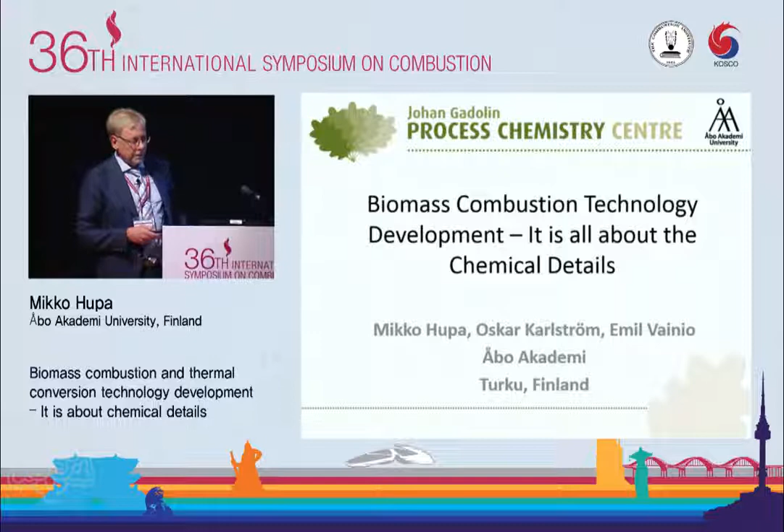I will speak about biomass combustion, and my main focus will be biomass combustion in larger units. It is heavily increasing in Europe and in Northern Europe, and there is a lot of interesting technology around it. The large-scale combustion of biomass can take place as co-firing together with other fuels, including coal, or it can be done in separate large-scale biomass units. Here are two examples of such units.

Fluidized beds. The upper one is a circulating fluidized bed by Foster Wheeler, and the lower one is a bubbling fluidized bed, another type of technology. Both of these are quite interesting when using biomass in large scale. For those of you not familiar with this kind of technology, here is an idea of the size - this is the guy you may be seeing here. They are very big units.

One important trend at the moment is the increased interest into lower grade biomasses. Wood as such, which was the starting point for all this technology, is in fact a relatively easy fuel in many ways. But when the interest goes to lower grade biomasses, many interesting things start happening on one hand. On the other hand, they are quite interesting fuels because they are cheap in price and easily available. So people have now started more and more talking about opportunity fuels rather than harmful wastes.

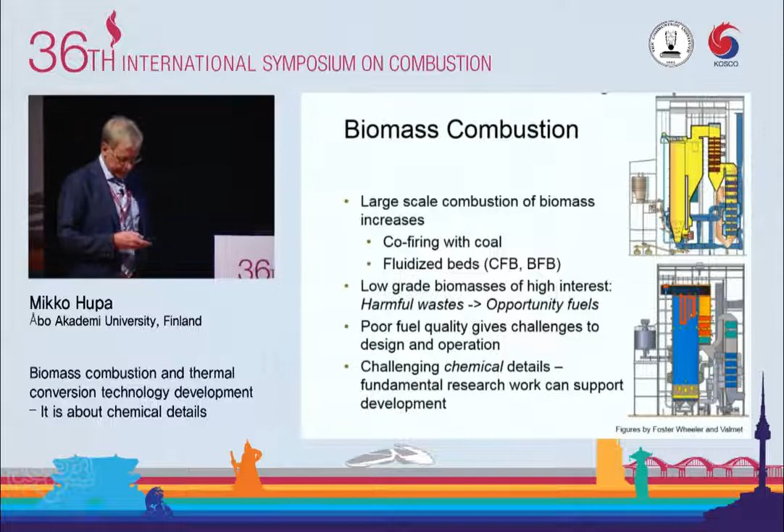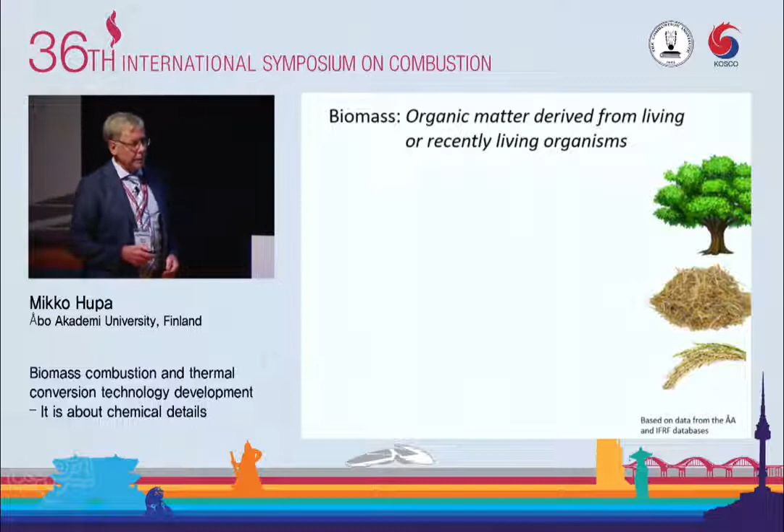Biomass is defined in different ways. This is a good one: organic matter derived from living or recently living organisms.

The graph which is used for coal, where we have a hydrogen-oxygen plot, hydrogen to carbon ratio, oxygen to carbon ratio, shows quite nicely how biomasses relate to coals. In this kind of graph, anthracite coals are down here, with very low hydrogen and very low oxygen. The younger coals place themselves here, with brown coals and lignites further ahead.

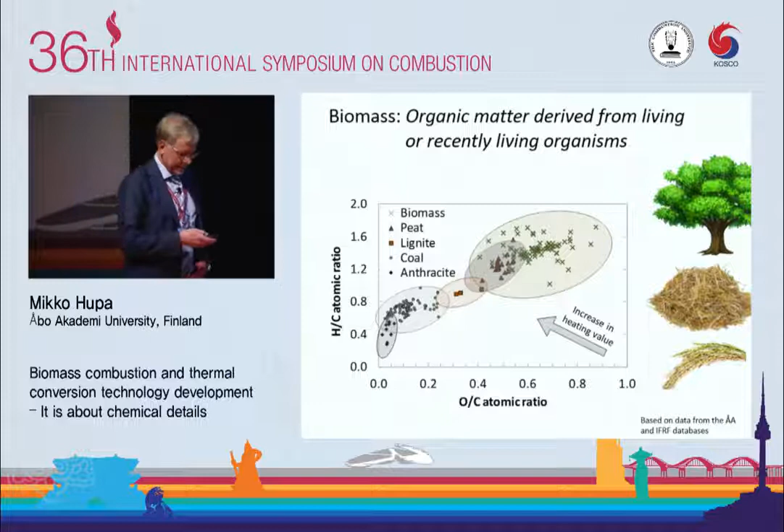Then comes an interesting group of fuels called peat. They are just in between before coming to the biomasses. So in a way, biomasses are very, very young coals, but from a combustion point of view, they are much more than that, and there are many other aspects. In this kind of graph, the heating value goes in this direction.

I have another picture showing the same relationship. Starting from anthracite, the volatiles content goes steeply up, and for most wood qualities or biomass qualities we speak about 80+% volatiles and 20% fixed carbon. The lower heating value in the same way goes down, so they have a low heating value, but on the other hand, as I mentioned, some of them are quite available and inexpensive.

Very importantly, they have very different ashes as compared to coal. The whole ash chemistry is different. For instance, the ash indexes being used in coal have absolutely no relevance when it's about biomasses.

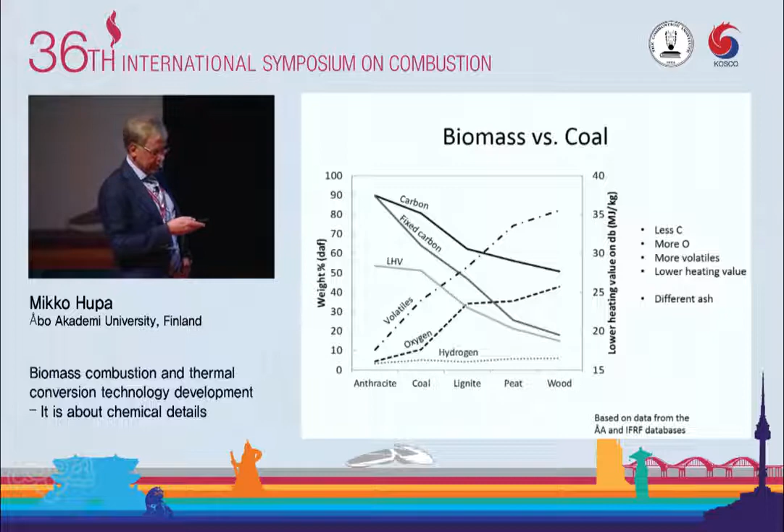Here is an example of one modern large-scale unit using biomass. It's a circulating fluidized bed in Jakobstad, Finland. Here is also the guy, so it's a huge unit, 550 megawatts, and it has the possibility to burn very different fuels.

Extremely interesting concept, but very demanding. You cannot burn all of these fuels from 0 to 100%. You have to know very well which combinations are possible.

One additional point here is to show that also here where the main fuel used to be bark or still is bark or wood, there is an increasing interest to start using also something we call forest residue. Forest residue is the material that stays in the forest after the paper guys have taken the logs. This green material consists of branches and needles and so on.

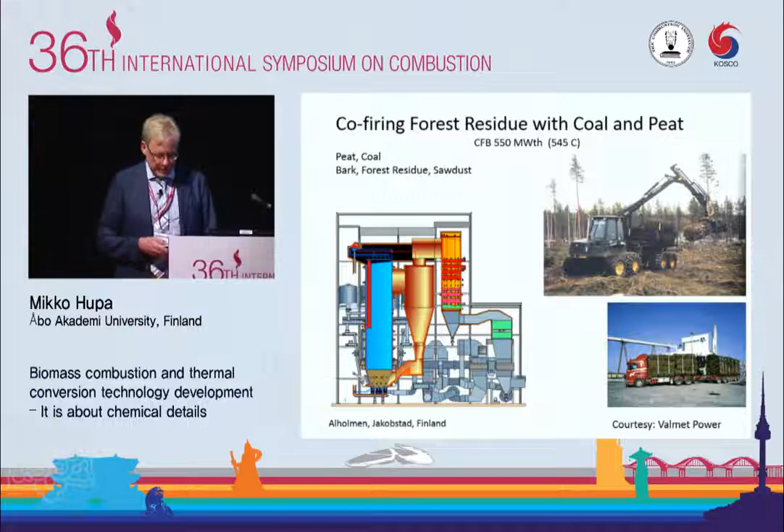There is a big interest, and also new technology to more efficiently collect that material and bring it in the same trucks that are used for logs, for this fuel. And then it can be burnt.

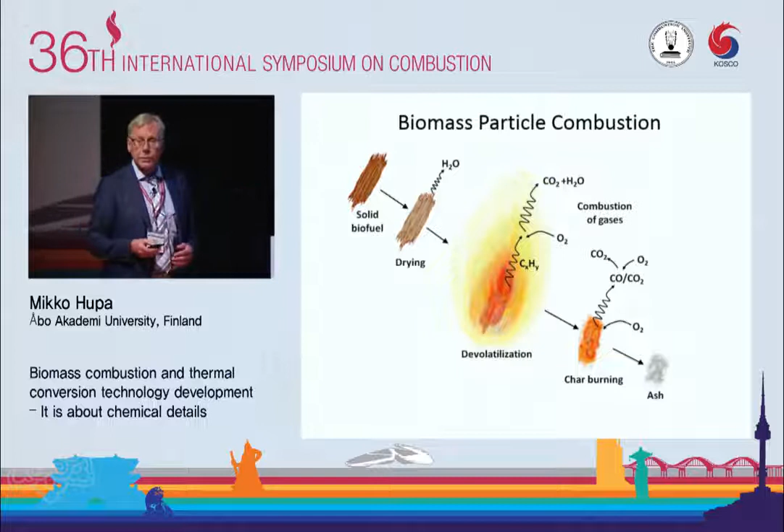Biomass particles have the same stages of combustion as coal: a drying stage, where normally there is more water in biomass than in coal, then the devolatilization stage, the char, and the ash. Devolatilization is more important since 80% of the mass disappears there. The char properties are also different, not only is the char smaller.

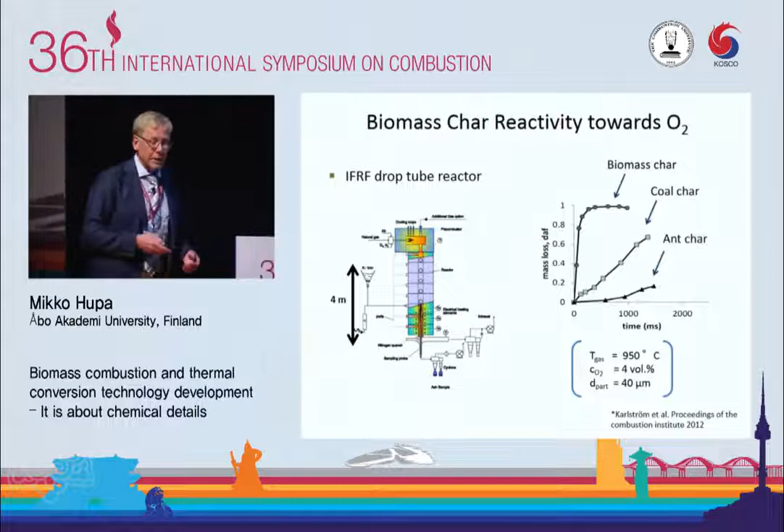I have a few examples here of char. These are test results using data from the International Flame Research Foundation database, produced in a drop tube furnace. Here are mass loss, or char carbon conversion, for anthracite, bituminous coal, and biomass, at a residence time of 1.5 seconds. This is just the char, not the complete fuel. You see the anthracite char reacts very little, while biomass can burn the whole char in this very short time. This is the same size, same mass of char, but the reactivity is much higher for biomass.

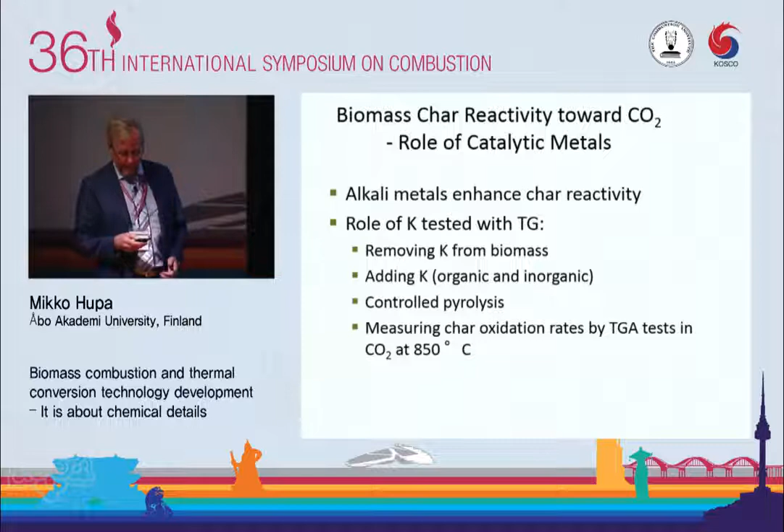That higher reactivity has to do with the ash ingredients in biomass, particularly the alkali metals like potassium. Recently we wanted to learn more about which factors affect char reactivity, so we took biomass and produced chars with different contents of potassium to see its influence. Here we have a biomass that we completely washed before producing the char, so the potassium content was zero. Then we added potassium, even in different forms, to the fuel, produced the char, and measured the char reactivity by TGA.

Here you see the char oxidation rate in percent per minute. This is not in air, this is in carbon dioxide, where the same reactivity is easy to detect, and you see, in a funny way, an almost linear correlation. We didn't add enough potassium to see it level out later, but definitely it will do that. This is just an interesting thing to learn, how sensitive it is to the potassium content.

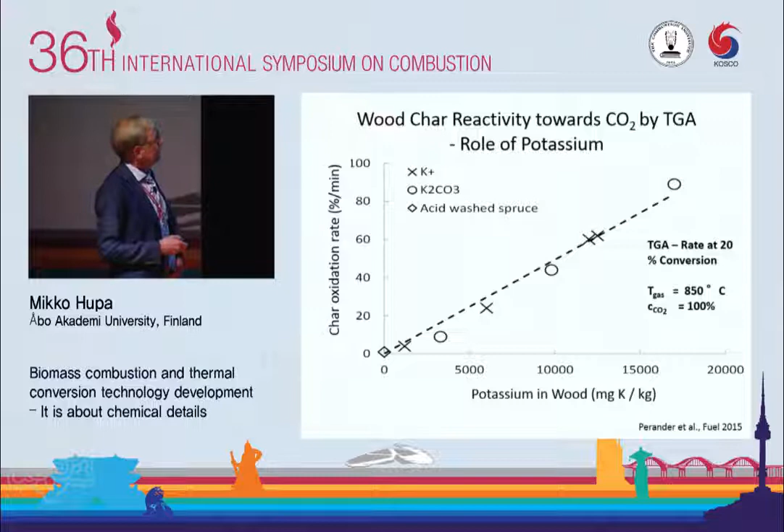Reactivity summary: very high volatile content, extremely reactive char due to catalytic metals. Char oxidation by CO2 and H2O is also so fast that even in ordinary combustion, those reactions need to be taken into account besides the direct reaction with oxygen. We've seen this when modeling particle burning, the gasification reactions need to be taken into account, otherwise we don't get it correct.

This has a very important technical consequence. Since the char is so reactive, that explains why we can burn biomass using bubbling fluidized bed technology, where all the char combustion takes place in the bottom of the boiler, instead of going to a circulating bed where char particles have a long residence time in circulation. This is needed for coal because of char unreactivity, but here we can burn it this way. This is much simpler and a less expensive solution.

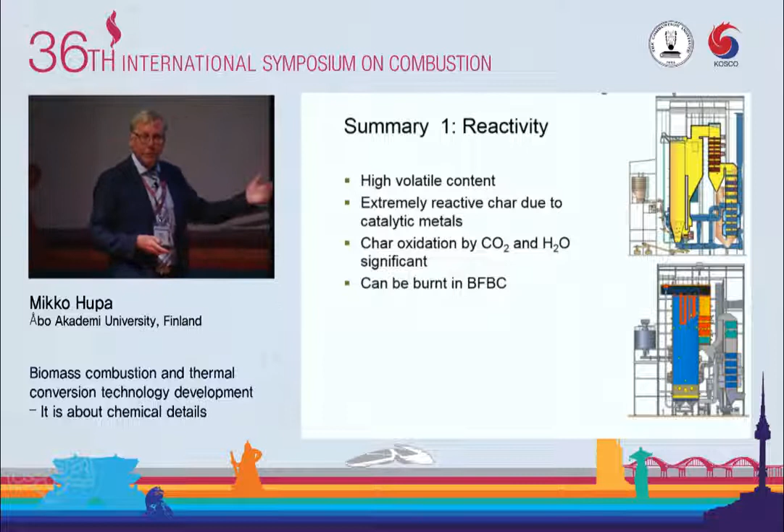In fact, the bed itself here in the bubbling bed is slightly reducing, so there is not very much oxygen there. So the char conversion mostly takes place by CO2 and water vapor gasification.

Some words about nitrogen chemistry. It's not very well studied before. You would expect it to be similar to coal, and partly it is, but partly there are nice surprises. The nitrogen content in different wood qualities is in the range of 0.1 to 1%, slightly lower than for coals, but it's still there.

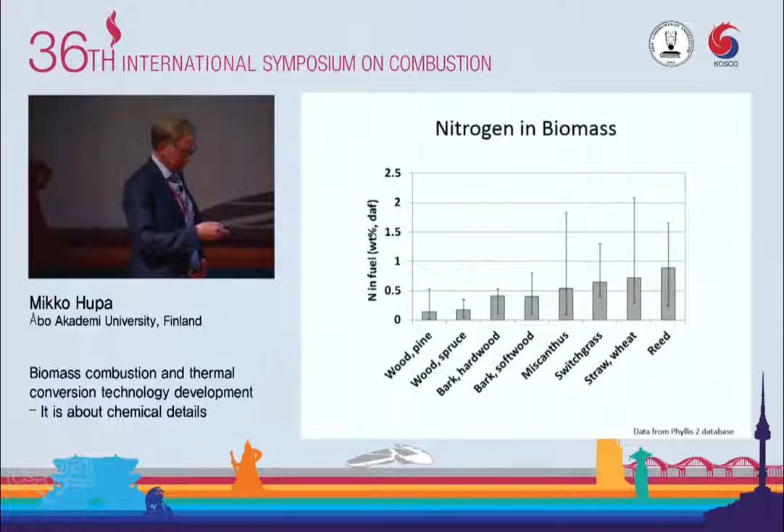If we burn individual particles, like here, in a laboratory, we can see nitrogen oxide formed. First the volatile nitrogen oxide, and then later the char nitrogen. Even if the char amount is small, it still also produces nitrogen oxides.

This is similar to coals, but of course the ratio between these two is very dependent on fuel quality. We were curious about this shape of the char.

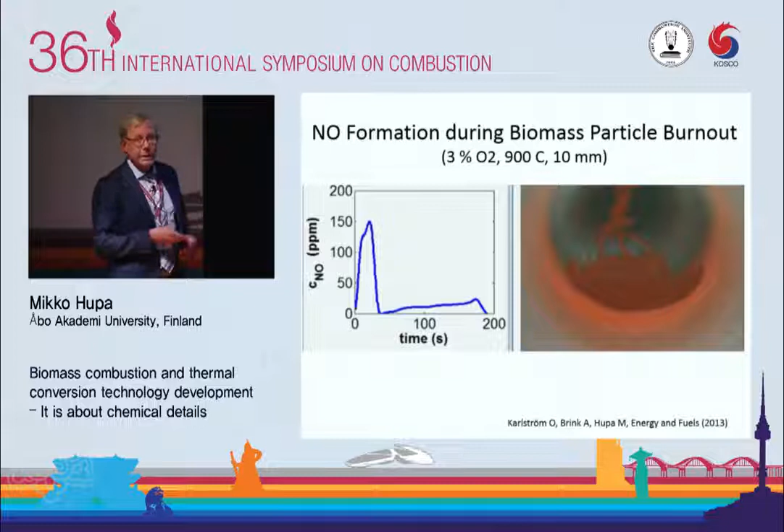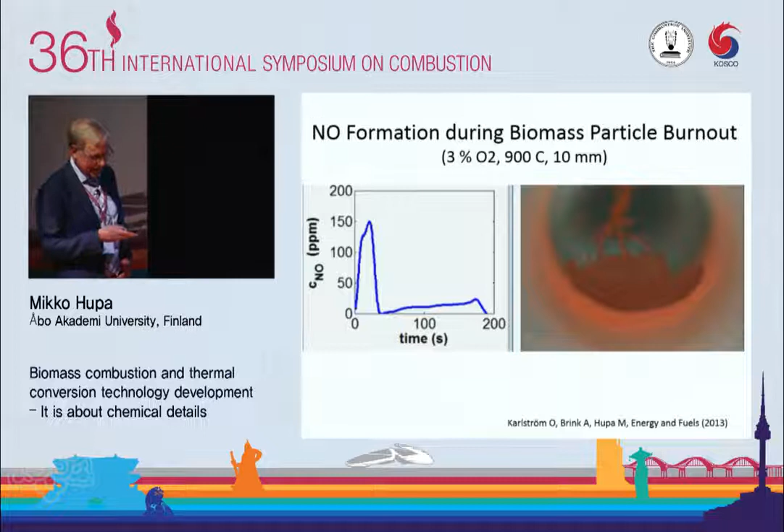Nitrogen oxide production: why is there hardly any at the beginning of char oxidation, and then the maximum production is just before the char is burnt out? It was maybe not so practically important, but it was a fascinating question to ask, so we studied it a little more.

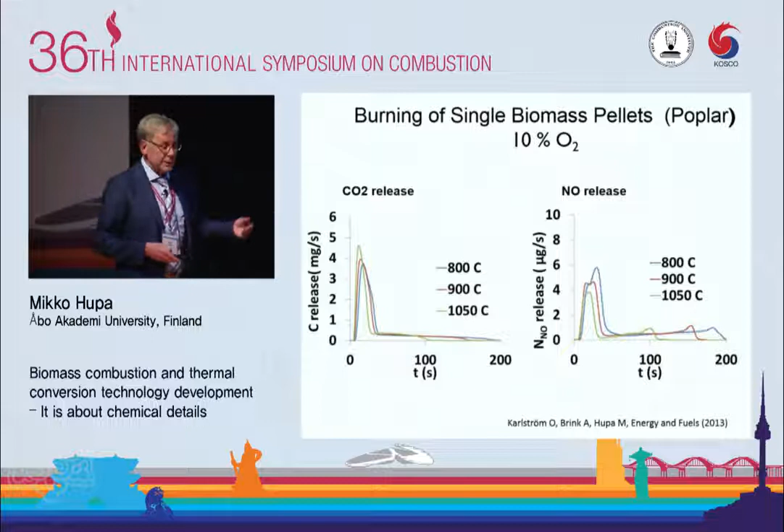The explanation here is that during char burning we produce NO, which is a heterogeneous process. Part of the produced NO diffuses away from the particle, but part of it can diffuse into the particle, and that is the key to this phenomenon. This ingoing NO will be reduced to N2 because of the active char.

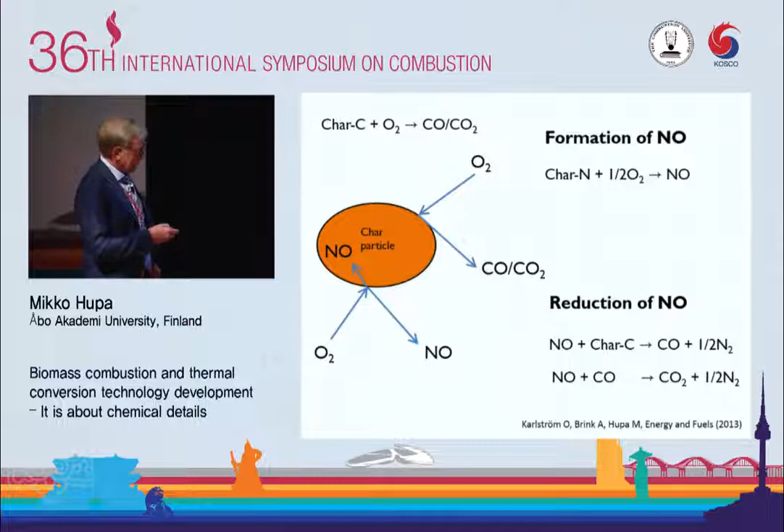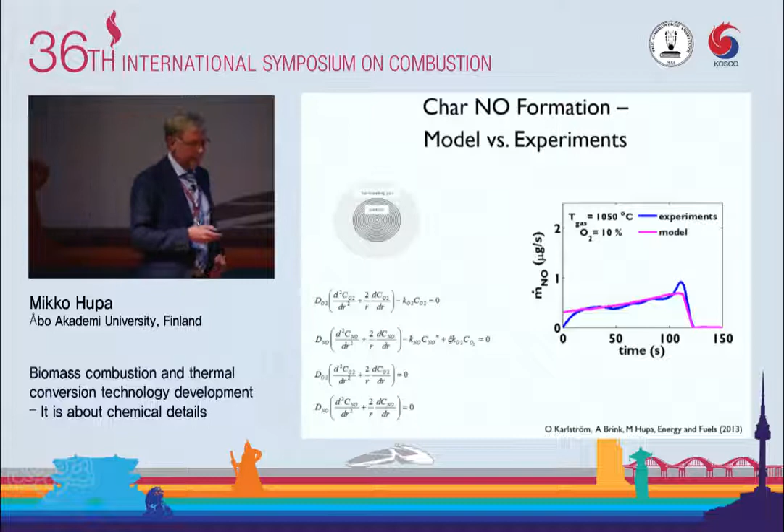Again, the specific reactivity of the biomass chars gives the explanation. This you don't see with ordinary coals, but here the reaction goes this way. We can model it, we can produce a standard model, and if we take into account the diffusion of NO and oxygen into the particle, we can create a model which reproduces this phenomenon nicely.

But what was more interesting, we did tests in a large-scale unit. This is the unit, a fluidized bed with a big freeboard. You see almost 40 meters, and we wanted to sample inside such a furnace and see how nitrogen oxide is formed. This was the topic.

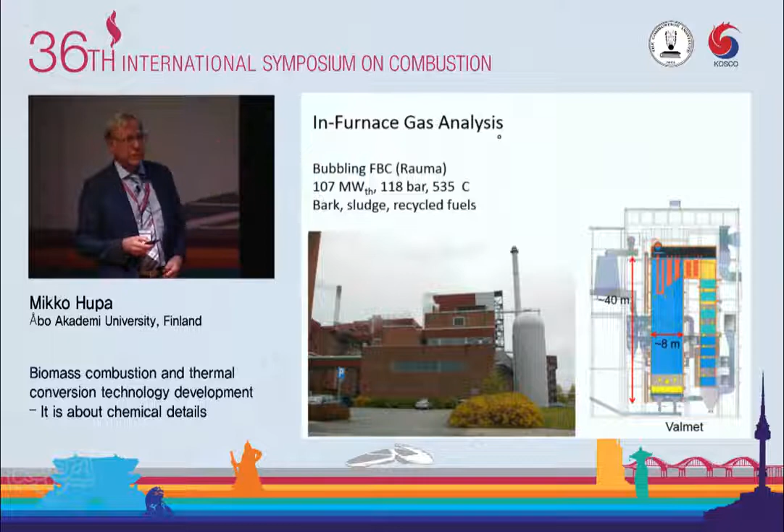This particular unit burns mostly bark, but it also has additional fuels. In our test, which I'm going to show, we were burning only bark, and the nitrogen content in bark is about 0.4. I will show our equipment, because this was quite a challenging work.

I have great respect for measurements in the laboratory with sensitive equipment, but this is a different game when the equipment grows to 50 meters by 10 meters. We used large sampling probes, pipes, and put them into different locations in a systematic way.

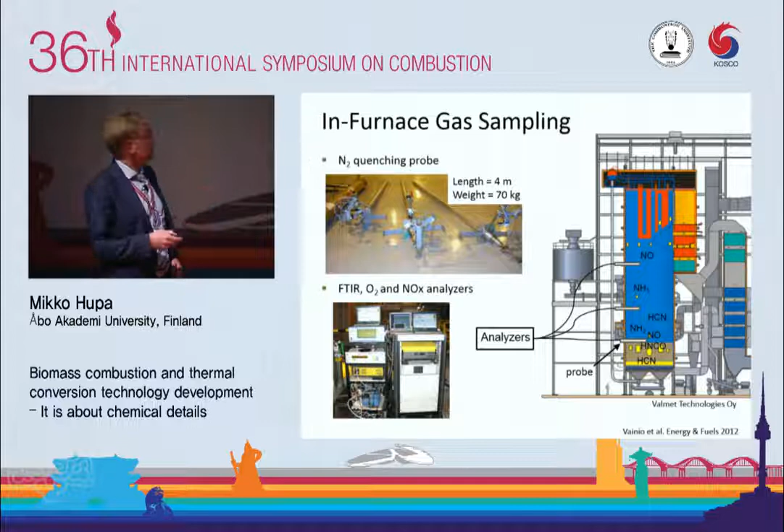The probe was a very special design. It had 4 pipes inside each other, and the gas sample was taken continuously, not just sampled. The gas was sampled in the inner pipe and fed to the analyzers. The outermost part is a ceramic piece which allows heavy, quick dilution of the sample and cooling to make sure there are no additional reactions in the pipes.

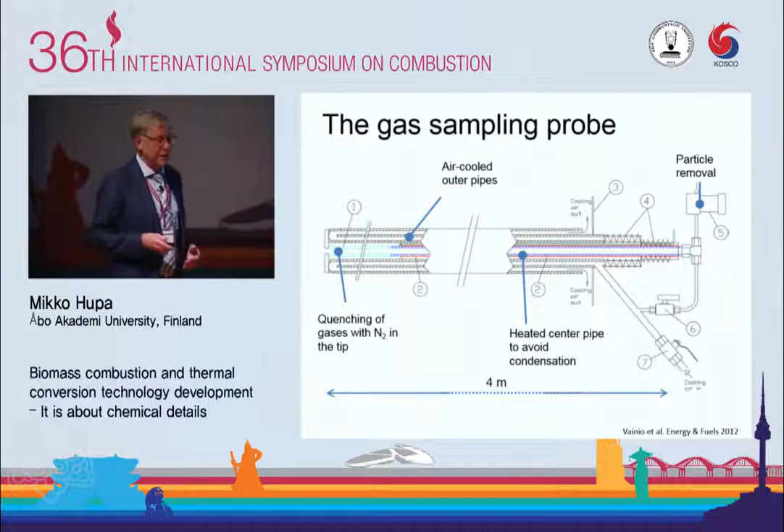But we should not cool too far, because then we get condensation of material. So we needed to heat the rest of the pipe - it was quick cooling and then heating. This one worked very well, finally.

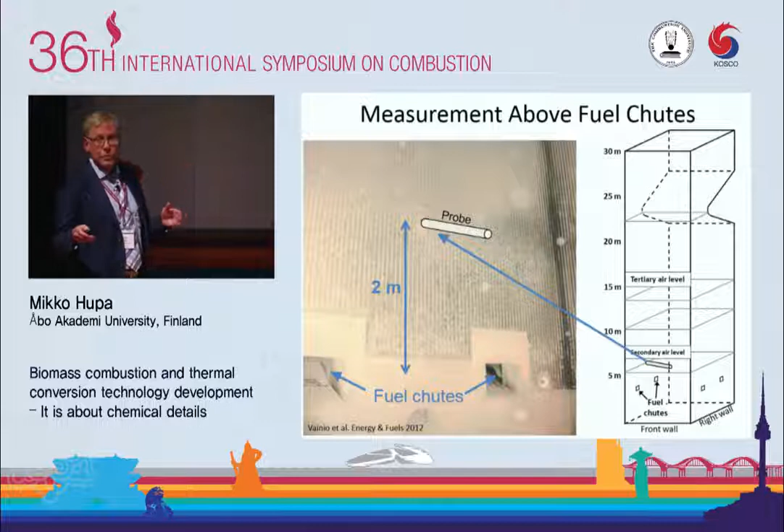Here's an example where we located it inside such a huge furnace. Here are the fuel feeding chutes, and the probe was 4 meters long, so we reached almost 2 meters into the furnace from different sides.

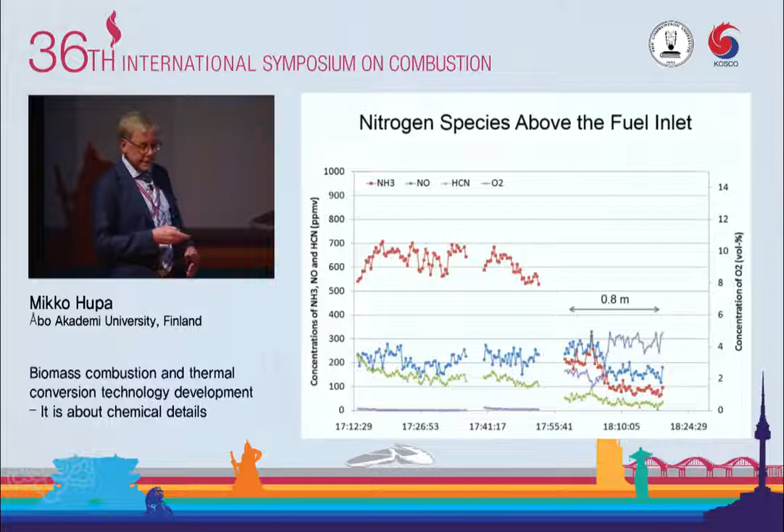Then we had to clean the pipe quite often and get a new signal. Here, this is 1.8 meters into the furnace. Then we pulled it a little further back, so it was only 0.8 meters in, and we get another signal. We did this in many locations in that unit.

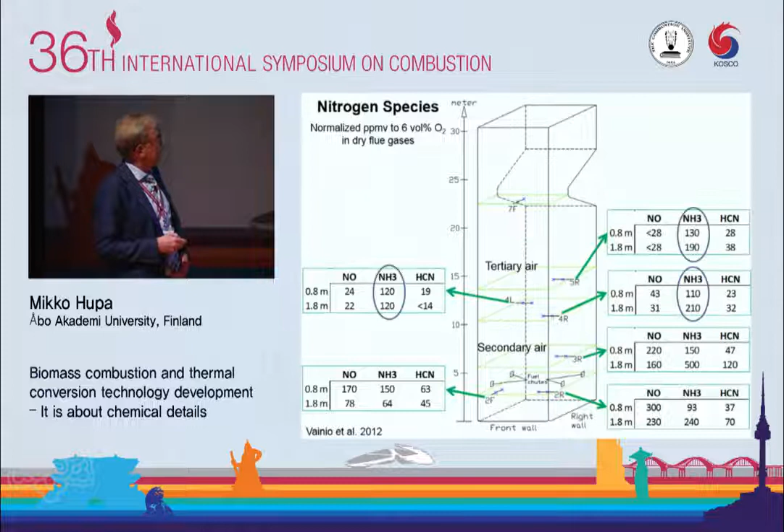Here you see the locations, and there were a lot of interesting data. Here you see the lower furnace nitrogen species, and then we had them all over here. Finally, the flue gas nitrogen oxides were 92 ppm.

There were a couple of interesting details we focused on. One was that we did find relatively large amounts of hydrogen cyanide, which we didn't expect, because in laboratory tests or tube furnaces you don't detect so much hydrogen cyanide for biomasses - it's almost all ammonia. But here, obviously, we have a chemistry in the lower furnace where some hydrogen cyanide is also produced.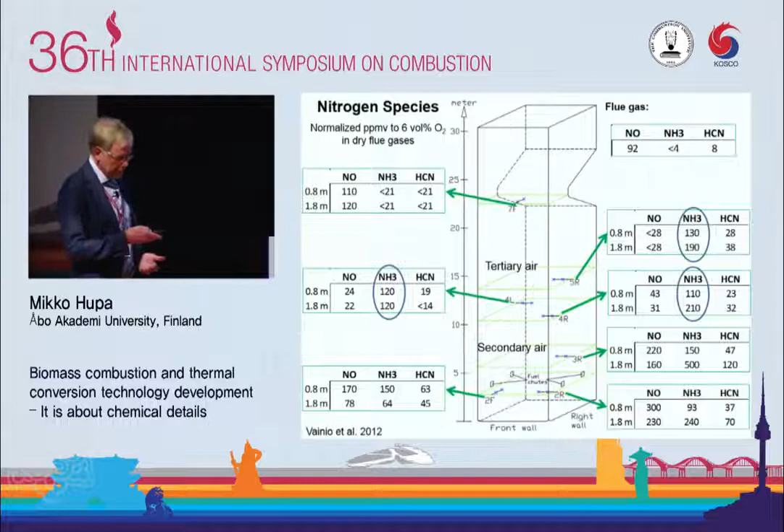But the more interesting surprise was that there was an extremely heavy reduction of the fixed nitrogen along the furnace. So in the lower furnace, we had almost all fuel nitrogen converted to fixed nitrogen.

But then when we went up and made measurements in different locations - here these points are collected - the ammonia, hydrogen cyanide, NO contents went steeply down, then stayed a while unchanged, and then continued going down, finally reaching only about 10% of the original. This is a very good reduction.

These boilers were not built for NOx reduction, so this effect came by itself, and we were quite curious how to explain this.

We thought we might try some modeling, because a special feature of these units is that their air distribution is quite a new type. These are very heavy air jets, about 7-8 meters long with a velocity of 60-70 meters per second when they come in, forming a very heavy horizontal jet.

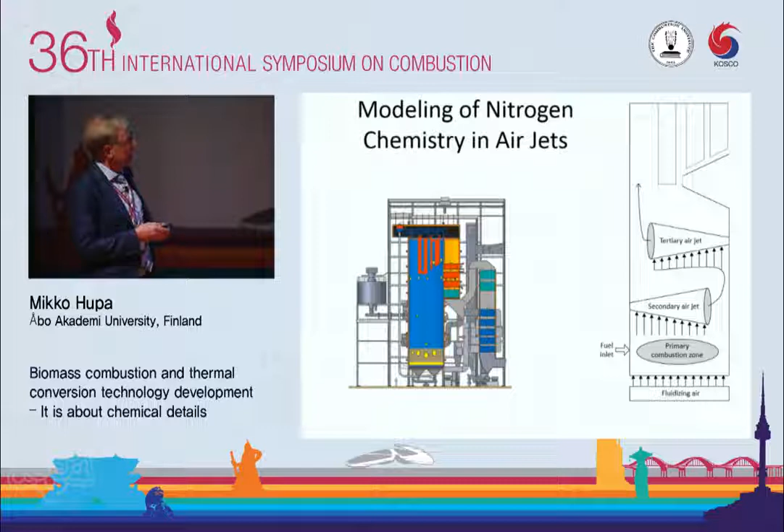We thought these heavy jets might have something to do with this effect. So we created a model where we simplified the furnace by assuming that most of the chemistry takes place in the jets. This is the approach we used.

We first calculated the jet size and entrainment, approximated by computational fluid dynamics. Then for chemistry we used detailed chemistry, but the reactor assumption was that we have a gradual entrainment of flue gas continuously according to the entrainment laws, using this Zwietering reactor—smooth, continuous feeding. This way we could put the complete chemistry in and see what happens.

Here is the result of that calculation. This of course assumes we have very efficient radial mixing, which is not the case, but that was the assumption here. Let's look at the results.

This is the complete jet, 7.5 meters long—a very long jet. Early on it's almost pure air, so the temperature is low, but it keeps increasing as more hot gas is mixed in. I forgot to mention that we used the measured primary combustion zone composition as the feeding material, so we wanted to see what happens to that gas as it enters the jets.

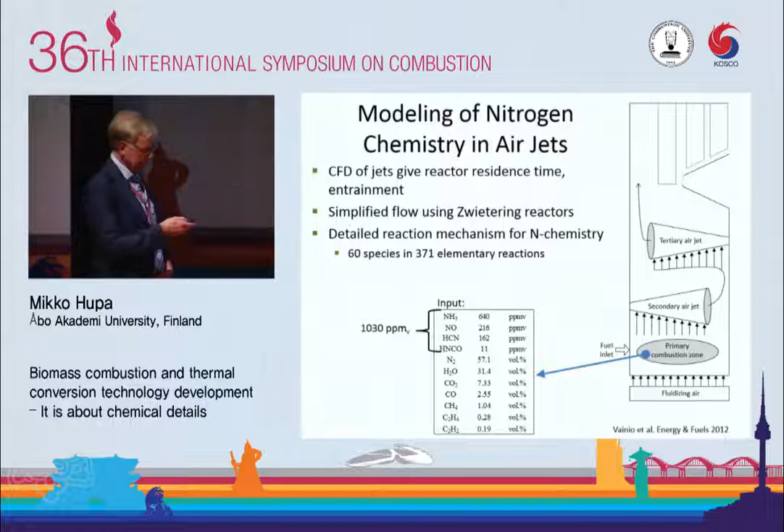The temperature increases until we reach somewhere around 800 degrees. During this period, over about 2.5 meters, chemistry doesn't play a role yet—it's frozen, too cold.

But then at some point the chemistry starts playing a role, and we see that the entrained ammonia suddenly disappears. Some NO is formed, and then both disappear. So there's a steep decrease in total fixed nitrogen until all oxygen in that jet is used up, and in the final part there's no more chemistry, only entrainment of neutral flue gases.

This is quite remarkable. My students started calling this the DeNOx region, but it's definitely not DeNOx in the sense of adding something—it just has similar chemistry, where ammonia and nitrogen oxide in that jet form conditions where DeNOx chemistry becomes very active.

Then the same thing happens in the tertiary air jet. We feed this gas composition in there and get a similar history: a cool period until we again get a similar reaction, NO and total fixed nitrogen go down, but we're already at a quite low concentration here.

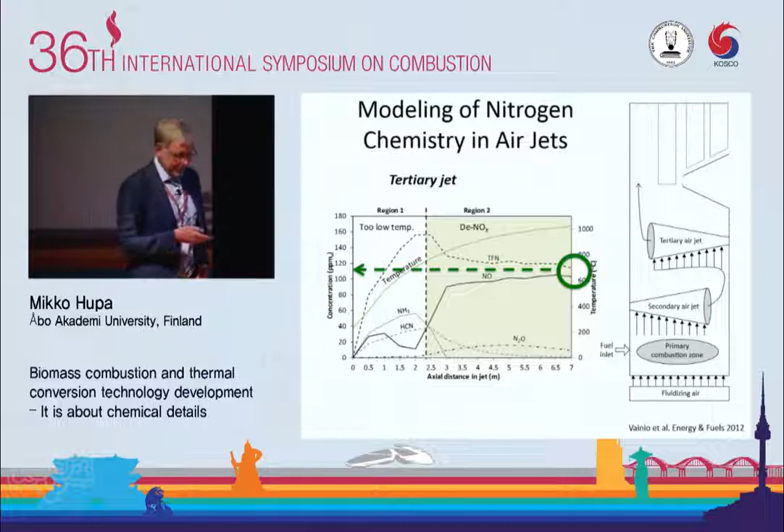Interestingly, the final total fixed nitrogen we get with this modeling is about 100, and you'll remember that was 90 or so in what we measured. So obviously this technology with these heavy jets, which was aimed at improving combustion and not at doing DeNOx, was efficient in this way also.

To summarize: there's almost complete initial conversion of fuel nitrogen to fixed nitrogen gases in the lower furnace, but then a 90% reduction. We think this is a special feature of this new air feeding technology. For circulating fluidized beds, the nitrogen chemistry is very different, but I can't go into that—there the char reactions start playing a role.

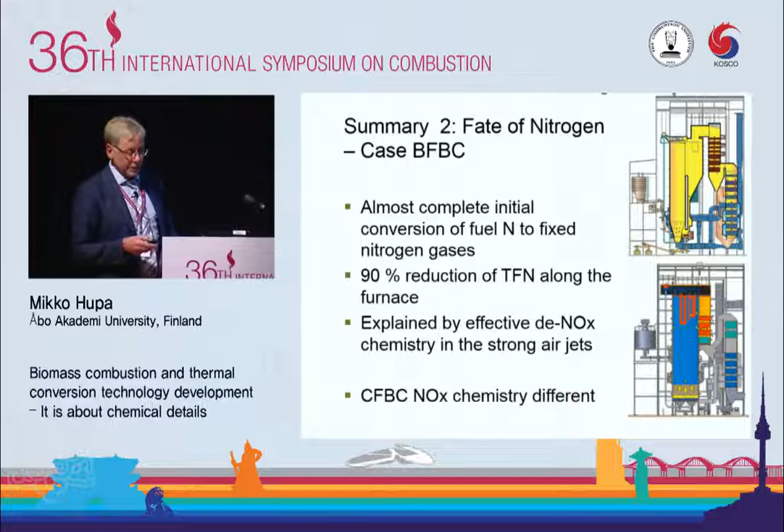Corrosion is a very important part of biomass combustion, and in fact it's the biggest challenge in technology development for these boilers. It's caused by chlorides on tube surfaces—that's quite clear, everybody agrees on that, but I'll tell you later that we don't agree on all the details of this corrosion.

This is the reason why the steam parameters are much lower even in the most modern power plants of this type. 500 to 520 degrees is a very high number if we burn biomass fuels, while in coal boilers, as you know, we can go beyond 600, and the materials issue is still not solved there.

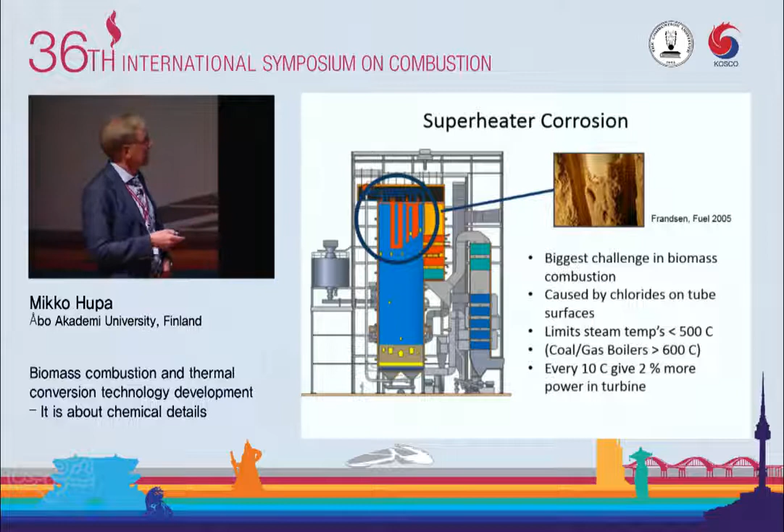A simple rule of thumb is that every 10 degrees we dare to heat the superheater steam higher gives 2% more power in the turbine. You can check if that's a correct rule of thumb, but in that range there's a big interest in improving this situation. Our boiler manufacturing colleagues, whom we work together with, are extremely concerned about finding solutions to improve efficiency—the power production efficiency.

Now we come back to chlorine and the ashes. This is chlorine, and particularly these kinds of biomasses - agricultural annual plants have high amounts, but also other biomasses have small amounts of chloride. I will show that it's sufficient with relatively small amounts to cause these problems.

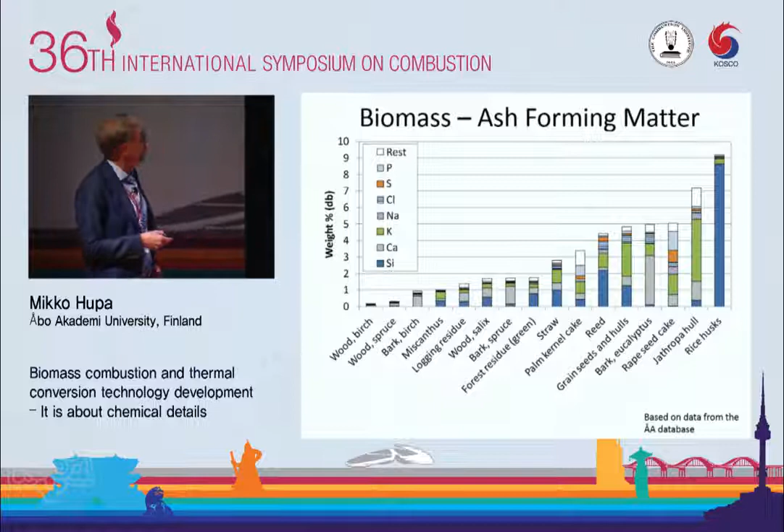This has been a difficult mechanism. Sometimes we have results which agree with this, but I will show you some results which do not agree. And you will see them here.

We do our laboratories, when we do corrosion, we do it quite simple. We have a sample plate of different steels. We put some salt on top of them, treat them in a furnace-controlled atmosphere. 1 week has shown to be a long enough time to get a good signal. And then we cut the piece and do microscopy on that.

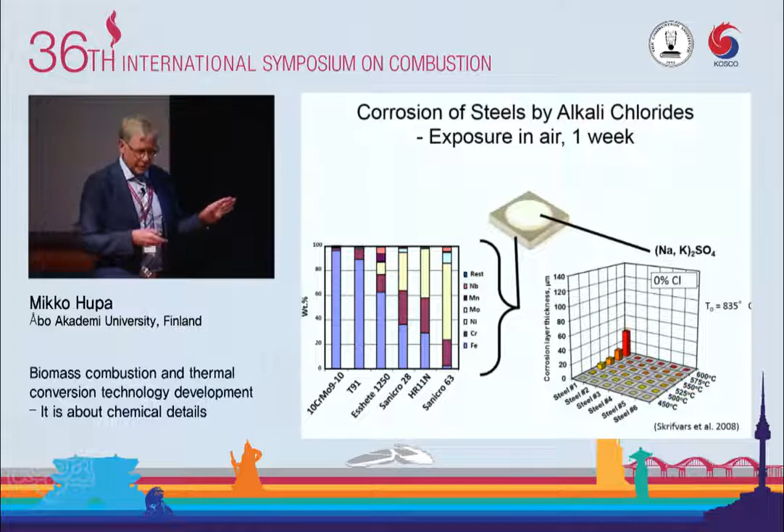However, when we start mixing chlorides, small amounts of chlorides into this system - this is the one I showed to you - we put 0.3% chloride. We did it by putting sodium chloride or potassium chloride into this sulfate, melted it in advance, and cooled it and crushed it, so it was very homogeneously mixed, the chloride. And you see that now these materials already start showing heavy corrosion. These are high numbers - micrometers per week. And this is already visible by eye on that short time.

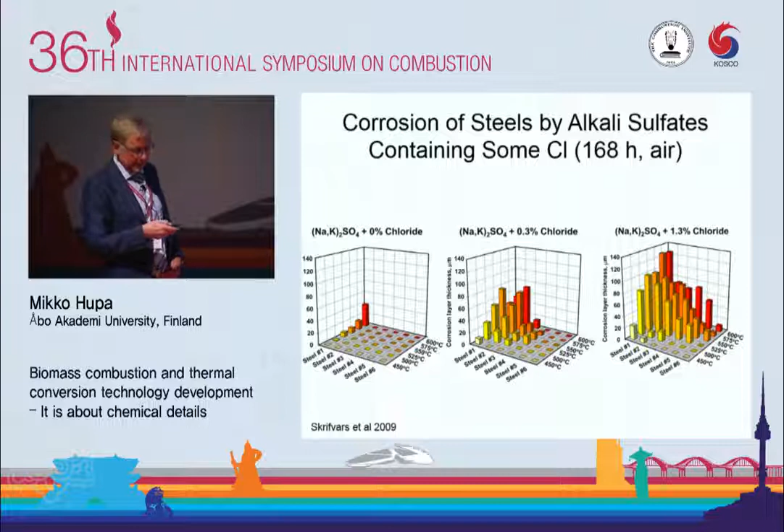And when we have 1.3% chloride, even the most expensive materials started showing clear corrosion at 525, explaining how this is really the obstacle to going to higher steam temperatures. But the interesting part here was these tests were made with no presence of sulfur dioxide, which was the key in this concept. So we are quite sure that this SO2 is not needed - only that we have this deposit and high temperature, and the things start happening.

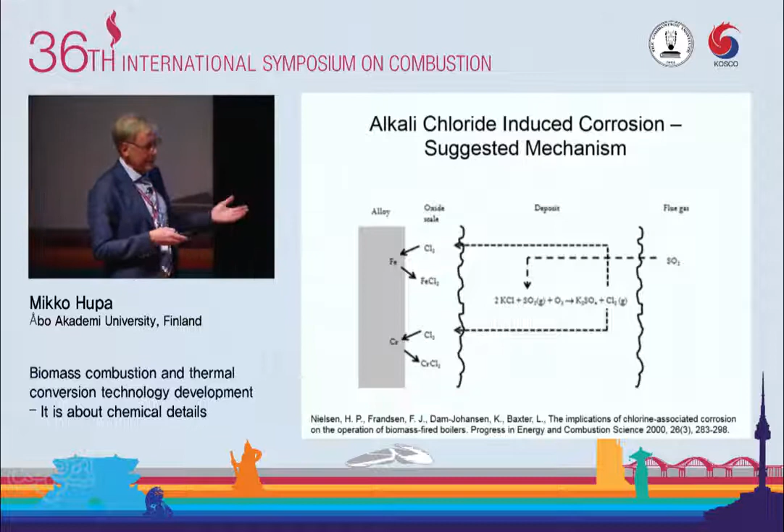So we need some other mechanisms to trigger the corrosion.

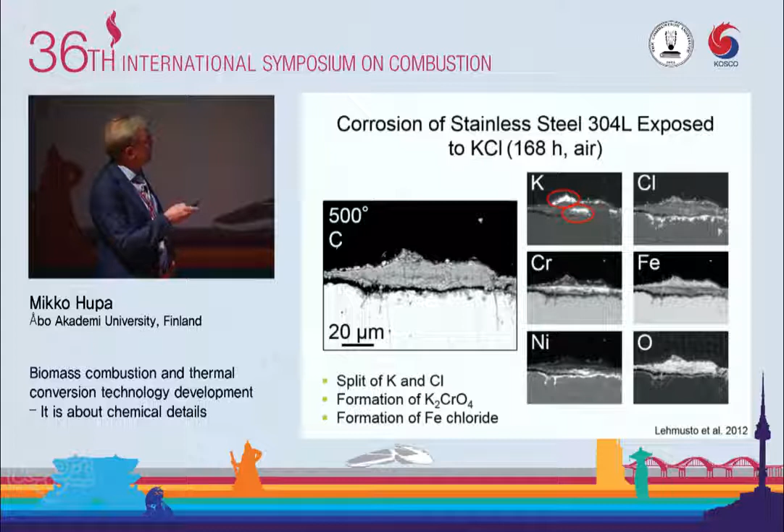I don't go deeper into this, but the key is that when we do this kind of microscopy, we can see that after a week exposure, the potassium is still on the surface, but it is no longer together with chlorine. So there is a split of potassium chloride, but this is not because of the sulfur dioxide - it's just straight on the surface. And we know from many tests it's an interesting formation of potassium chromate, the chromium layer on the surface. And that chromate formation has not really been so well reported before.

Now it is a great, interesting thing. And which conditions does the chromate form? It doesn't form for a long while - it's just an intermediate which breaks the surface.

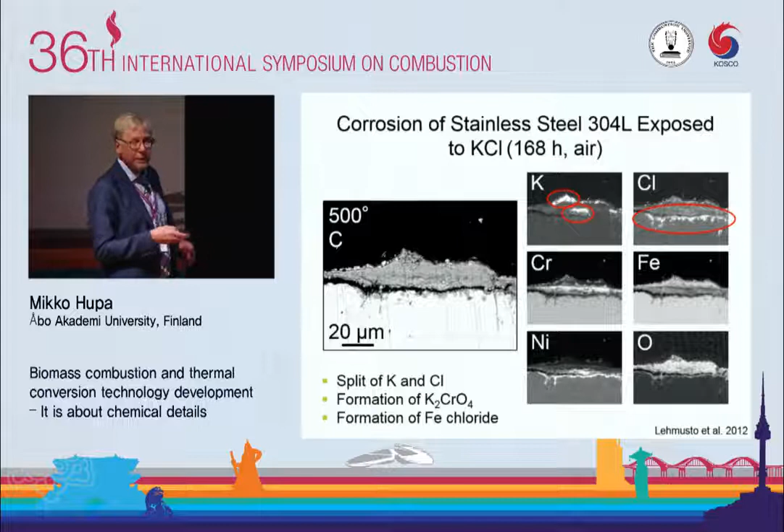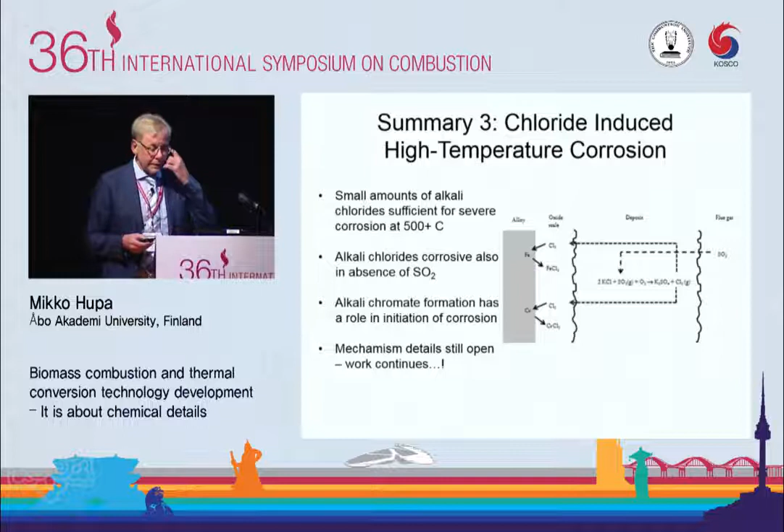Small amounts of alkali chlorides are sufficient for severe corrosion at 500 plus degrees C. This is one conclusion: alkali chlorides are corrosive also in absence of SO2. This alkali chromate formation has become an interesting thing, and there is work going on to try to understand a little better why and how that happens. It's almost amazing because if you read the literature, chloride corrosion has been known for 30, 40 years, and we still keep arguing about the mechanistic things. But that makes life fascinating also.

How do the manufacturing companies react to this? Today, this is the largest ever boiler running only on biomass. It's 447 megawatts. The one I showed earlier was a mixture of biomass and other fuels, but this is only biomass. Here you see the critical temperature is 535, so they have really extended it up to the maximum, but didn't dare to go further.

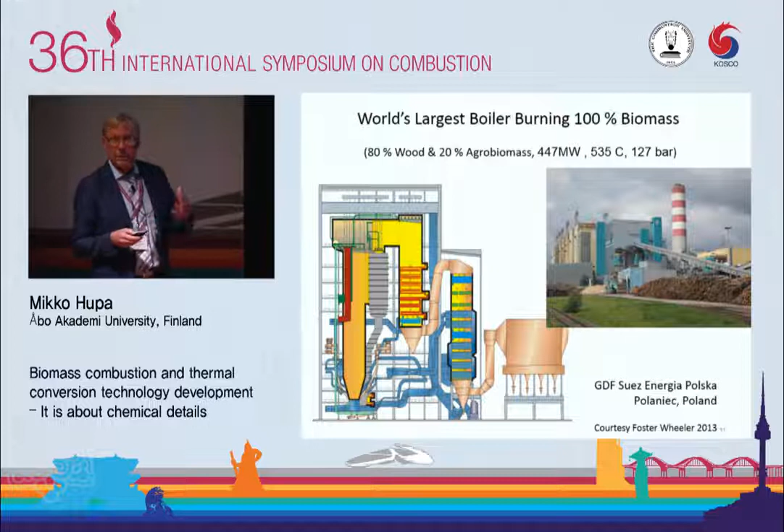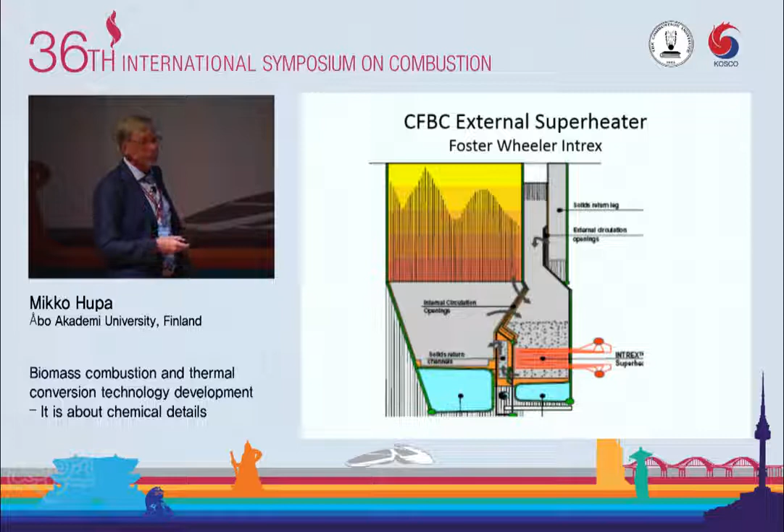How do they do this? Because they also use agrobiomass, which is the more difficult fuel, containing chloride. One interesting solution comes from Foster Wheeler in Poland. In a circulating fluidized bed, this is the furnace. The bed material is circulated back, and there is a feeding system that returns it to the furnace. That feeding system is also a small bubbling fluidized bed, and they put a heat exchanger, the hottest superheater, in there, and could increase the steam temperature somewhat by contact with the hot sand, without contact with the flue gases and the chloride. This is one way of showing how things have advanced.

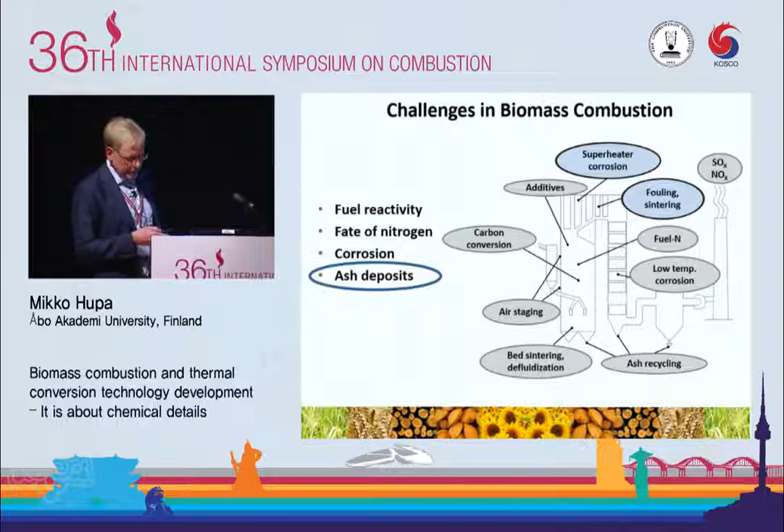Now, a few words still about ash deposits. Corrosion is one aspect, but then the whole fouling issue is another one. One detail we were interested in: we know that when we sample ash deposits, either with probes or from the boiler, we see that the deposits are not homogeneous. They look different on the tube surface as compared to the flue gas side. And it's quite obvious because there is a temperature gradient across the deposit. There was a lot of discussion about how this temperature gradient influences the deposit over time, with speculations that maybe something happens.

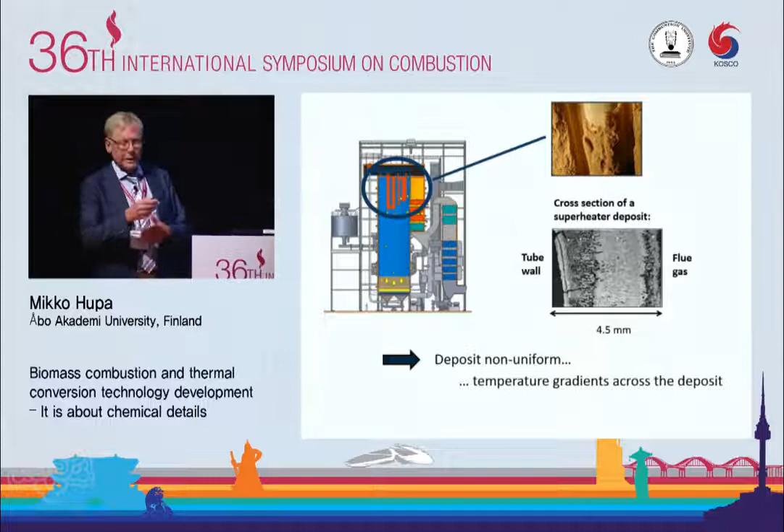We were wondering if we can study that in the laboratory. Now, it's not easy to create a steep temperature gradient in the laboratory. If you calculate, you can show that on the steam side, the tube wall, then the deposit, and then the flue gas side, if we have 1,000 degrees here and 500 here, the steel will be, of course, about 520, 530. But we can have a gradient of several hundred degrees, 200, 300, 400 degrees, within the deposit itself. So the material in the deposit experiences an interesting environment.

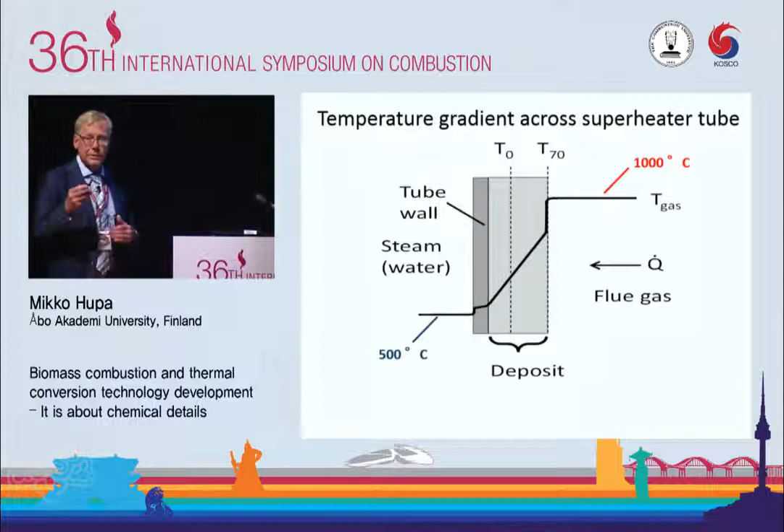Finally, recently we were able to produce such a gradient also in the laboratory. This is not a very clear picture, but the idea is we have a cooled pipe where the inside temperature was 500 degrees, for instance, and then we can put our deposit sample here. But we have to cover the rest of the tube for heat transfer reasons. Then, with only that part open and a hot furnace around, we can create something very similar, and we can have a gradient inside that deposit.

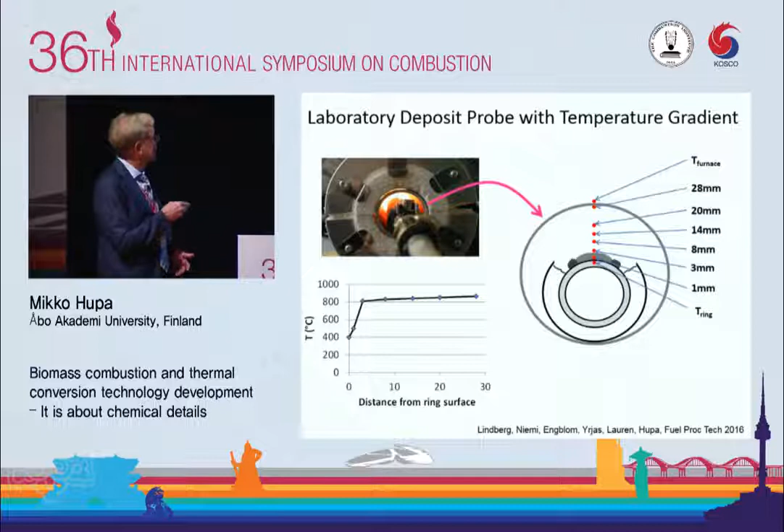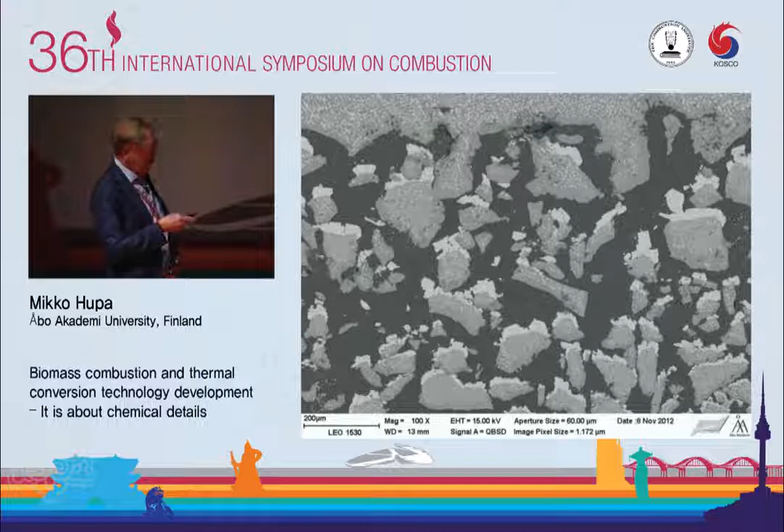But if we take a closer look, we start seeing that the type of the particles has also changed. The particles didn't look like this when we put them in. Now they have this white layer on top. And if we take one more close-up, we can see that yes, each particle has received this white layer of material, and also the lower part looks different. The center of this particle shows how they looked originally, at the beginning, the original salt mix.

So we have the sodium sulfate gray matrix and sodium chloride crystals in that matrix. They were prepared by melting and cooling, so that's how it looks.

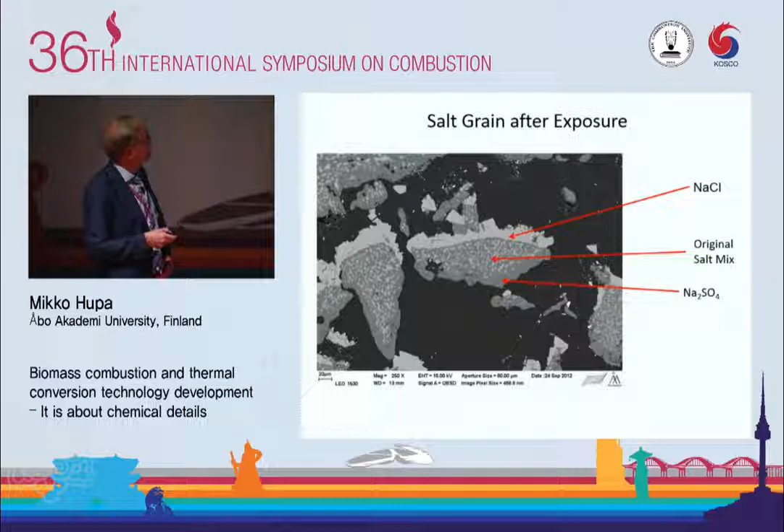But within 24 hours in this temperature gradient, the sodium chloride started vaporizing and condensing onto different particles, some kind of vapor transport which took place quite quickly. And now today we think we understand that quite well.

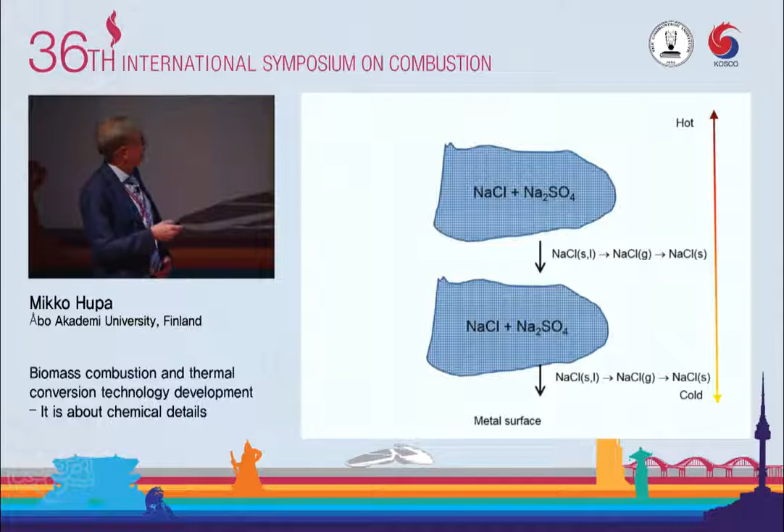So if the cold is down and hot is up, this is the way it goes. Simply, sodium chloride starts vaporizing and is removed from the lower parts of the particles, and then it hits the next particle. The interesting thing is that the driving force here is an extremely small temperature difference. These are small particles, 100 micrometers, but it's sufficient to transport material.

The consequence of this is that this chloride will partly go all the way to the steel surface, depending on the temperature conditions, and can enrich high amounts of this, even small amounts of chloride. So this is something we want to study more.

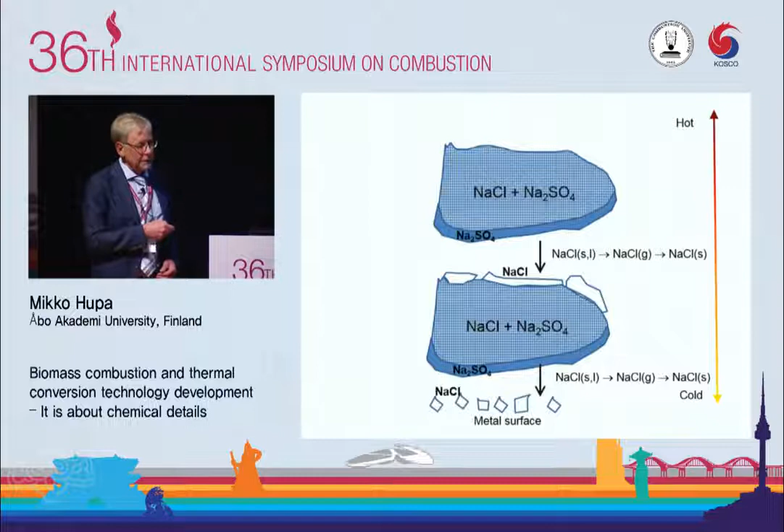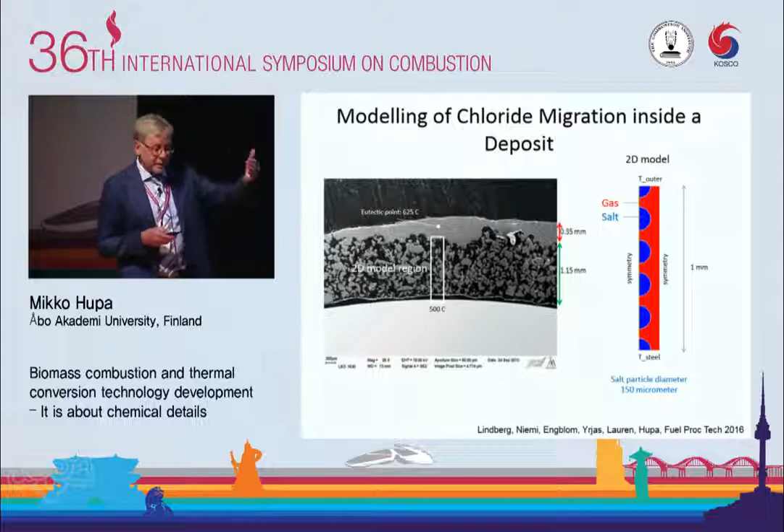We have been able to model this phenomenon with a two-dimensional vaporization condensation model, and we can get theoretical curves which fit quite well to the layer thickness. We can measure the chloride layer thickness as a function of time. This is a new area.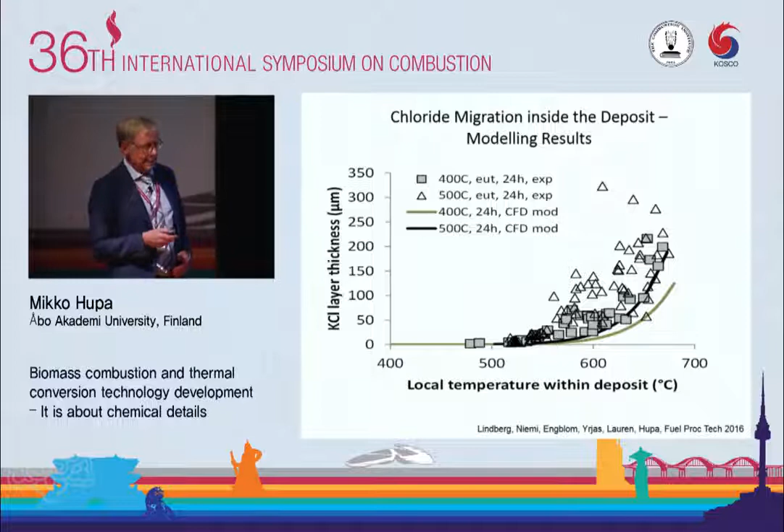We call it gradient chemistry, in inorganic chemistry in temperature gradients. It can be important in other applications as well. Deposits change with time due to temperature gradients. Volatile chlorides migrate towards the cooled tube surfaces, and it may have an effect on the corrosion properties of the deposit.

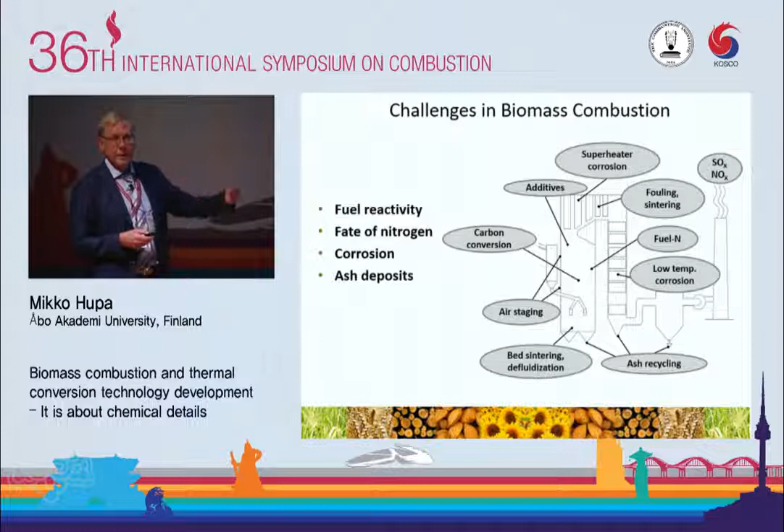Now, these were examples of fundamental work which support continuous development. Of course, one small piece of fundamental work never gives the final solution to the design of the units, but we've been very happy with our collaboration with these companies, who have worked with us for many years. Gradually, the information we have been able to produce and the communication we have with them has led to a lot of work which has shown to be directly useful.

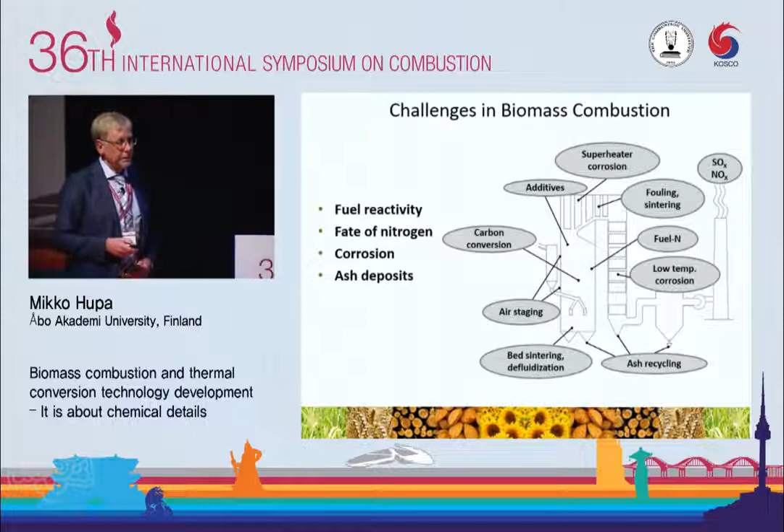How will the future look? It's clear that biomass today is mostly used by combustion. In fact, bioenergy from biomass is 95% still based on combustion. But we have heard many good presentations here at this conference about other optional ways of using biomass to create other energy carriers.

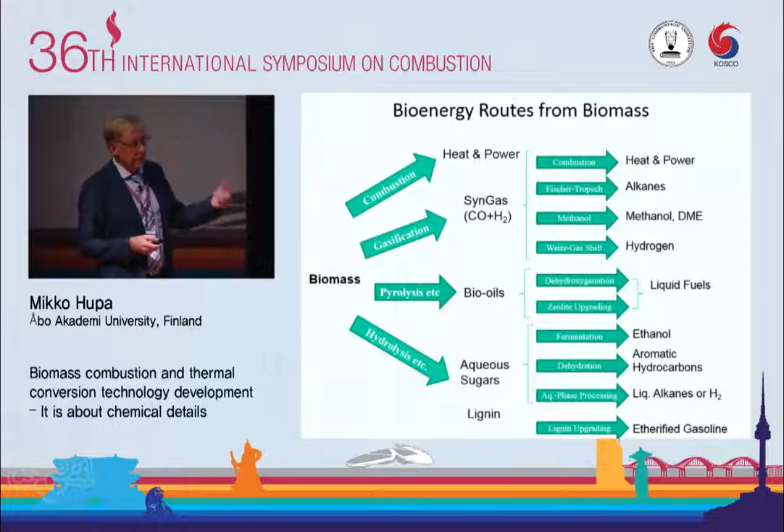And this will, of course, be a trend which will continue. Here we are quite sure that there's a lot of space for research, because whichever technology we start using will be very sensitive to the biomass feedstock quality, and we're back to the impurities - chloride, nitrogen, and so on. This is one highly interesting project going on.

There are, I think, two or three plans in Scandinavia to go for biodiesel production combined with an ordinary pulp and paper mill. It has the advantage that the pulp and paper mill has a huge logistics system for biomass, and we have biomass residues which are not used in the plant, which could be used elsewhere. The idea here is to have a parallel line with an oxygen-blown gasifier, gas cleaning, and Fischer-Tropsch synthesis.

Would be highly interesting. A lot of technical challenges there, a lot of interesting work to be done. But that is one option.

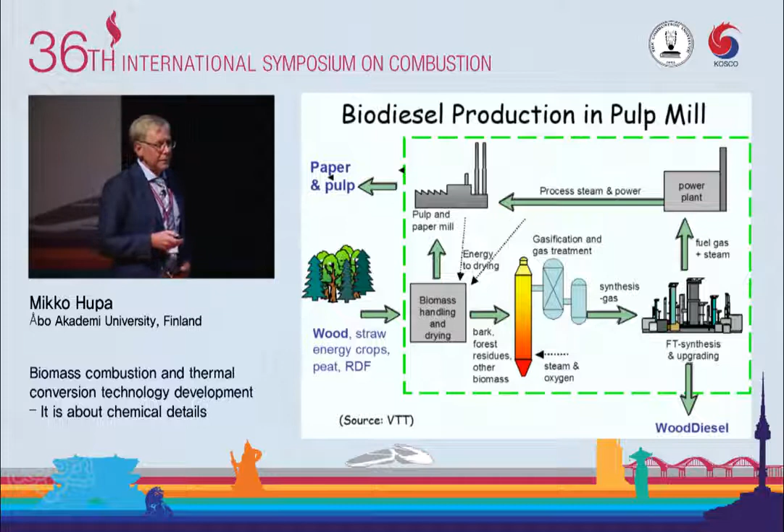I would like to finish by also stressing that it's good to do research work which is not directly related to problems in our area. And I want to show you one interesting piece of work by one of our co-workers, Andrei Pranovich. He's a wood specialist, and he was interested in analyzing one annual ring from the wood cross section.

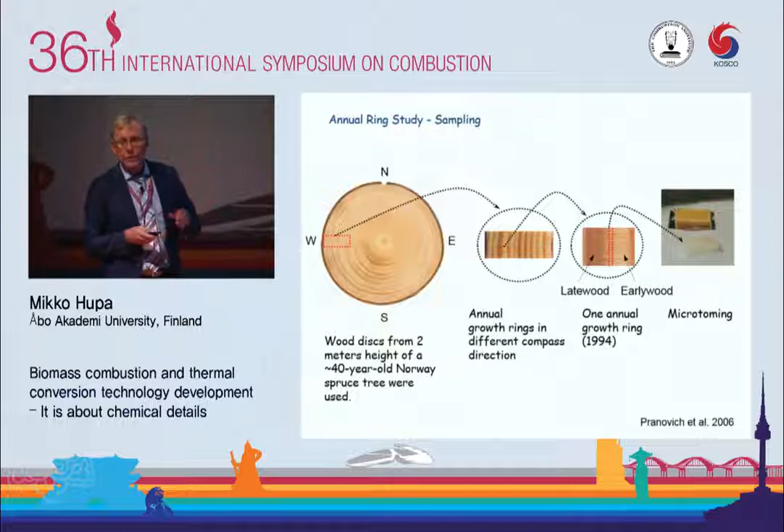He had a technology to take that one annual ring area and microtome it into slices. So not only did he analyze the ring on average, but he wanted to know how that ring changes as a function of time. And this is what he found.

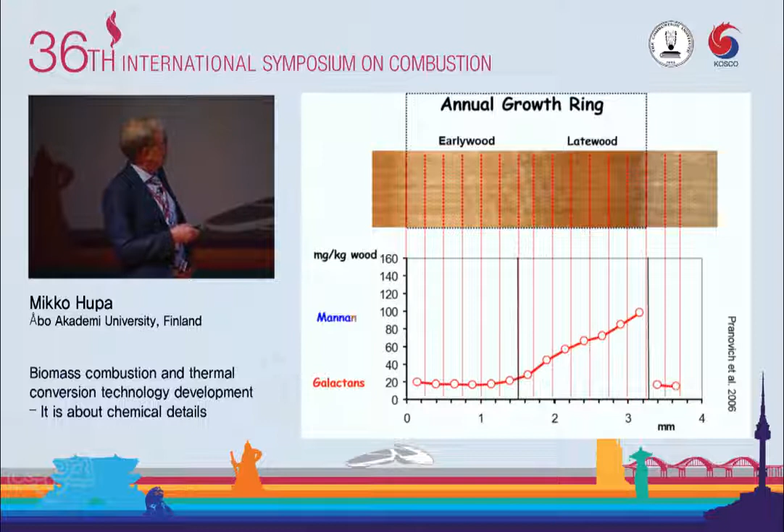He sliced that one annual ring into 10 slices, and he measured the concentration of hemicellulose, the main components being galactans and mannans. He could see that early in that annual ring there was less galactans, and then toward the end of the growth of the annual ring they increased.

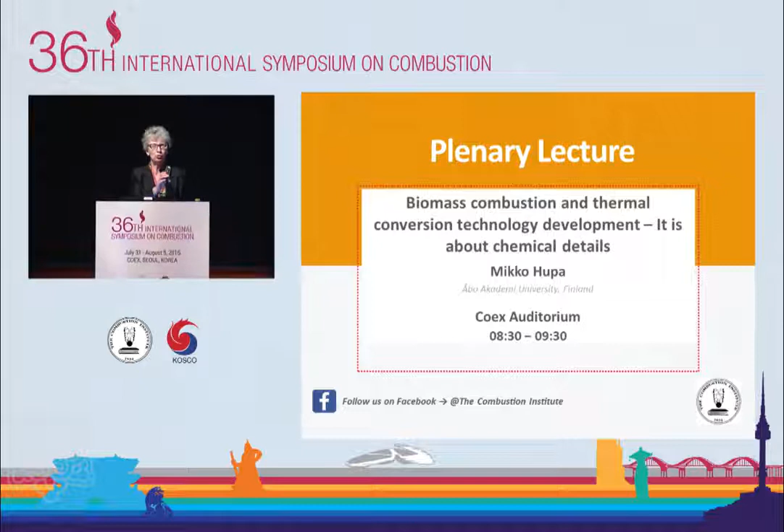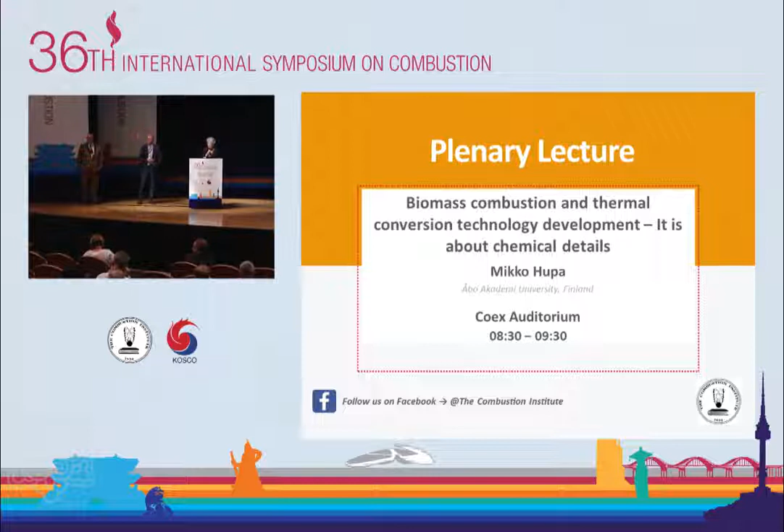Oh, okay, hey, thank you. I'm Elaine Oran, from University of Maryland. I had two questions. One has to do with the safety of forests. I know what we were trying to do is clean up after the logging, but I always thought the debris that was out there was pretty good for the future growth. So some decisions would have to be made if you were going to collect it for biomass. That was my first question.

The second one was just a curiosity. When you showed a comparison between the model and the measurements, the measurements showed a funny little bump at the end and then went down. Do you remember that graph? The model had the right trend, but it didn't qualitatively show the bump at the end. It sounded like there was something totally new happening, possibly some acceleration process. So those were my two questions.

Thank you. The latter one, you referred to the nitrogen oxide production curve. I'll answer that first. You're right, it followed the smooth trend, but then there was a little interesting dip there, and it repeated itself for most of them. That's a good point. We have been thinking about it, but we don't have a ready answer. Probably something happens to the particle at the very end of the char burnout, some collapse or something that suddenly gives an additional little kick. But that's open. That's a good question.

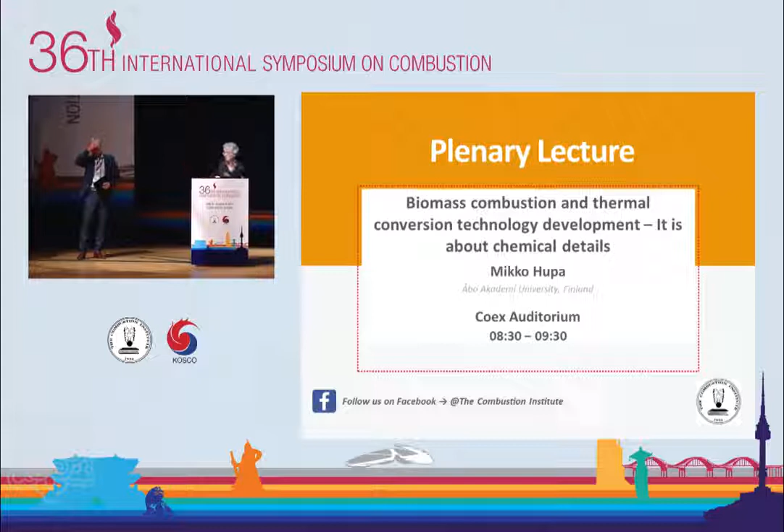Okay. So how do we, oh, that way. Not upside down. Yes, okay. There you go. Thank you. Thank you very much.